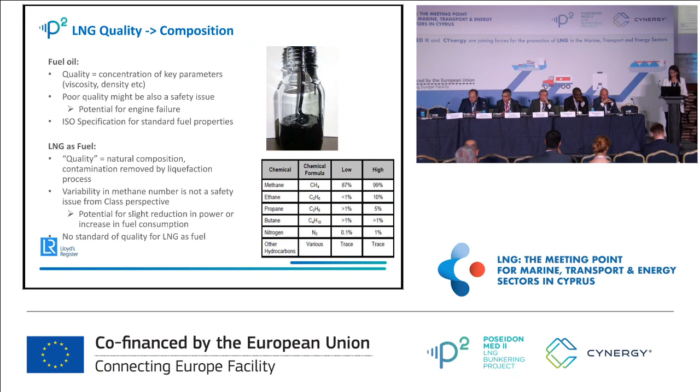The solution is very simple: it is forward planning. We need to take into consideration, first of all, the availability of the ports where we go, and also the ability of our machinery to use this type of LNG composition based on the trading area. One more thing we need to consider is, of course, the contractual arrangements. We need to have proper contractual arrangements in place before the arrival of the vessel at the port.

Now, with respect to the quantity, the solution we have decided to propose at milestone 16 is pretty straightforward. It is tried, tested, certified, approved, and most probably globally accepted by the LNG industry, and it is described as the GIIGNL handbook volumetric measurement, simply as that.

We have also thought whether we can try to use mass flow meters for measuring the LNG as fuel. However, we need to consider that mass flow meters have very recently been marinized, meaning they have started being used in Singapore from the 1st of January, compulsory for fossil fuel oils, so for the traditional fuel oil.

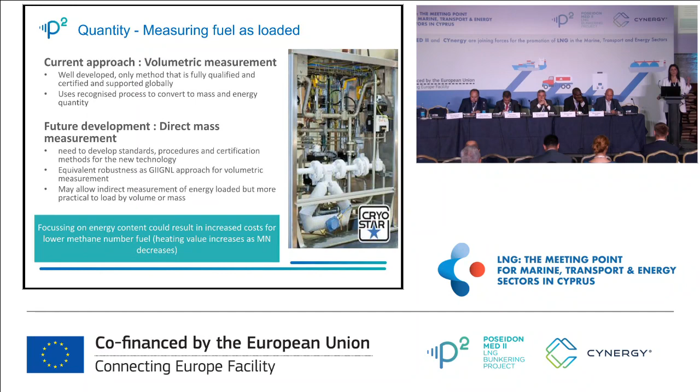One more thing we need to consider is that if we focus very much on the energy content, which is highly possible because with a mass flow meter you avoid calculating density and viscosity and go directly to mass, simplifying the quantity calculation, it is highly possible that we could end up with increased cost as we use LNG fuels with lower methane number.

Our technical investigation department based in Southampton, together with us, decided to conduct an evaporation study of the LNG quantity. We have made some assumptions.

Some of the key assumptions we made are, first of all, that the tank does not have a pressure or mass flow inlet or outlet, so we don't expect any boil-off gas outflow, and there is no preferential evaporation of species from the LNG. You understand most probably that these are not totally identical to reality, but we need to make some assumptions.

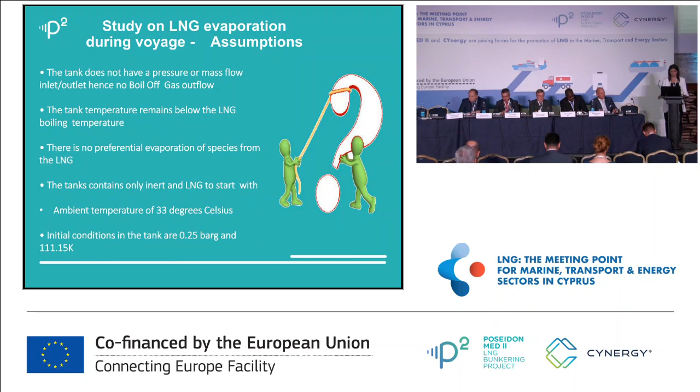Another assumption is that the ambient temperature is around 33 degrees Celsius, and the initial conditions in the tank are 0.25 bar and 111 Kelvin. Based on these assumptions, we proceeded with the modeling.

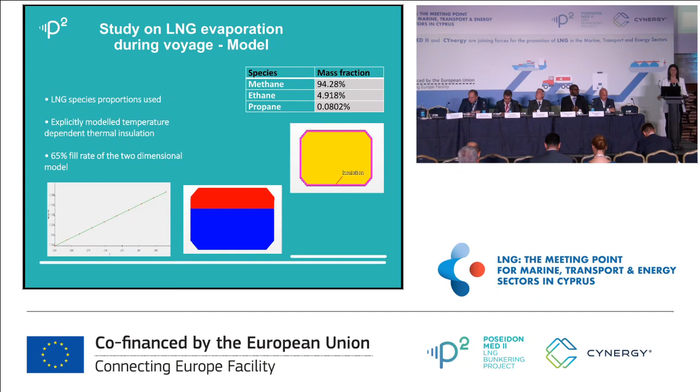The result of the evaporation study showed us that 0.1% of the total mass evaporated before the saturation point was reached, and the pressure in the tank reached approximately 0.7 bar at the saturation point. This second finding has also been reconfirmed by other studies conducted through Poseidon MED activities.

Now more on milestone 16 in the report: we have 6 routes as per Poseidon MED 2. We start from the key terminal, Revithoussa, and from there we expect the supply chain route to go to Iraklion, Igoumenitsa, Piraeus, and Limassol.

We also have one more future small-scale terminal based in Patras, and we expect the LNG to be delivered from Revithoussa again to the Patras terminal, and from the Patras terminal to the Igoumenitsa port.

Based on these 6 supply chain routes, and considering various types of operation, because it's not only one as has already been described, we have bunker vessels with type C bunker tanks. It is expected that we might also see trucks, because of the small scale. So we have terminal to bunker vessel, ship to ship, terminal to truck, and truck to ship.

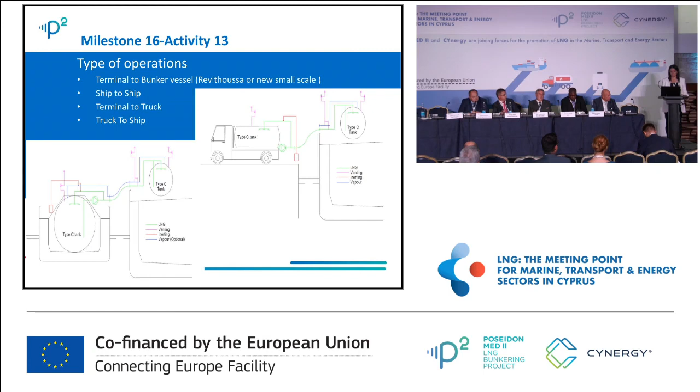All of these operations, along with the 6 supply chain routes mentioned before, have led us to create some flowcharts. I have decided to present you two of them. The first one is from the terminal to the ship, where the LNG goes from the terminal to the ship.

It is with the barge or the feeder where we have their type C tanks. As I say, this is a closed system, so it is expected that the quality will not change. When we say quality, we mean practically the density and the gross calorific value. So we allow the terminal to define these. And finally, what the ship gets is practically the volume, which has been measured again in the terminal, times the density, times the gross calorific value, minus any energy that has been consumed while the barge was using LNG as a fuel.

The second flow chart that we are presenting here is approximately the same, but in the middle you can see that we have the feeder with the membrane tanks. So it is expected that we might see a little bit of change in the quality of the LNG. We expect to see some difference in the density and the gross calorific value, not that significant though, because the volume is around 7,000 cubic meters, and the maximum days of operation is about 7, so we don't expect a lot of change.

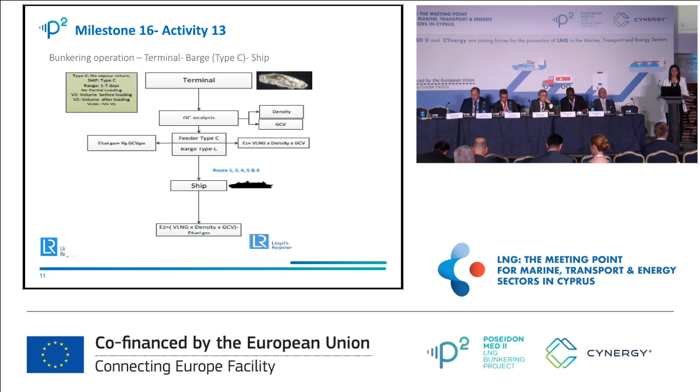Except for the flowcharts and procedures I have already described, covering various scenarios and bunkering operations, inside the report you might also find the energy transfer determination sheet, certificate of quality, and a proposed bunker delivery note. These are documents that, especially in the first flowchart, will go directly from the terminal to the ship. So we don't expect any significant involvement in the middle, which is totally different from what is happening currently with traditional bunker fuel oil.

In the traditional bunker fuel oil business, there is a lot of manipulation with respect to the fuel, and possibly malpractices that might happen in Singapore or other areas. With LNG, due to its nature, it's not that easy to be done. So practically the responsibility goes back to the terminal, and the documents given by the terminal are the ones that are valid.

I would like to conclude by saying that this report is not static, it is a dynamic process, and it is expected that it might most probably change, taking into consideration other activities that may come, as well as any industry developments.

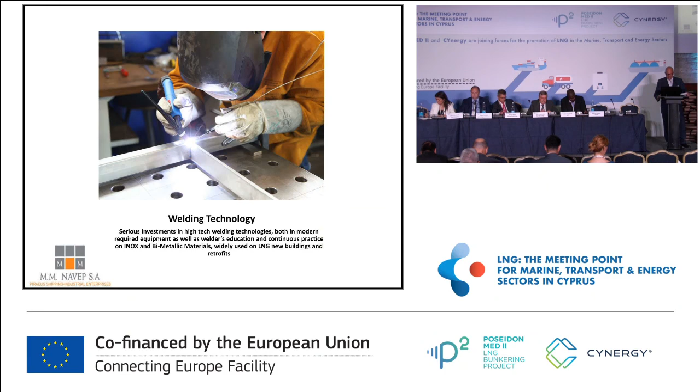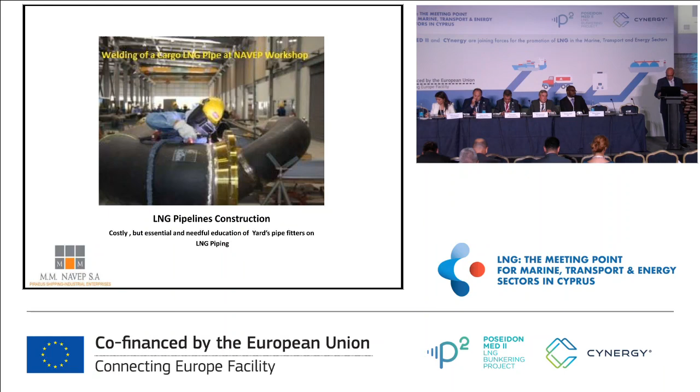Furthermore, pipe construction totally differs and varies from traditional ballast or bunkering piping. It is costly and essential - otherwise yards will not be able to undertake nowadays LNG new builds, for sure.

We have to invest in in-yard simulation of LNG storage facilities in order to process a complete loading and discharging sequence prior to vessel delivery. We are not constructing bulkers or tankers anymore. We have to prove and be sure, when delivering an LNG vessel, that the loading and discharging sequence, or the bunkering sequence in case of retrofit, will be completely assured.

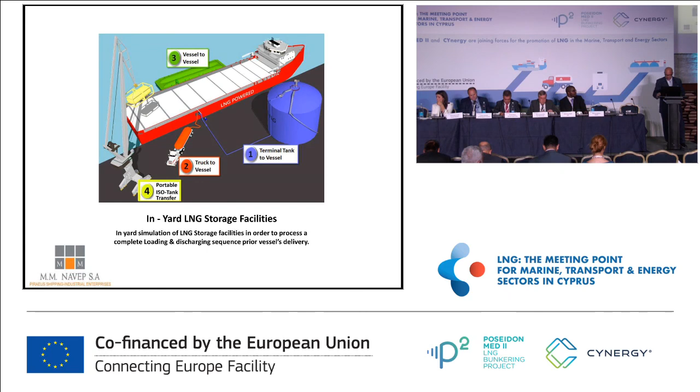The mentality of safety of our workers is one major topic. It's a very important issue. It's not anymore dealing with bulk carrier as a double bottom, but is dealing with highly flammable materials, explosive materials in some cases, and we have to be very careful with this, and invest also in safety material as well.

Most of all, in order for a yard to appear competitive in the LNG new building market, it has to offer reasonable deliverable packages, including designs, engineering, and supervision for building of the LNG units. The last chapter requires increased high-tech human in-house education skills, of which the daily presence on the ongoing projects is essential for the correct fulfilling of LNG new buildings or conversions.

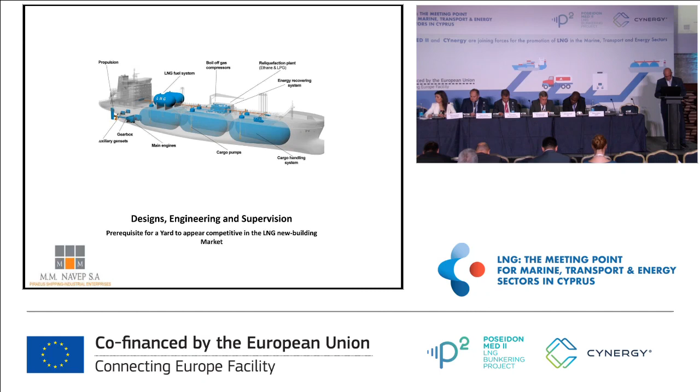Entering the last section, allow me to concentrate and give emphasis to a few active Greek yards which are able to fulfill the above stated technical prerequisites. We have not started at the moment, but we are here and willing to come in contact with owners, with operators. These yards, like Elefsis yards here, and Neorion yards in Greece, have for sure the adequate knowledge and experience, both in design, engineering and production, and are willing to undertake LNG projects related either to retrofits or even to new buildings.

Yards like this, and a great number of other middle-sized productive yards, it's really a pity for them to remain out of the active worldwide and fair competition, at the same time that one of the most major clients to the famous Far East yards are Greek shipping companies.

It's an honor for me to announce that our yard, Navep in Salamis Island, is the first one being examined and preliminarily approved by the Poseidon Med II program. Thus, we are proud to declare to the present community that we are here, offering in Greece and in Cyprus our expertise in LNG retrofits and new buildings, especially having lately fulfilled in Greece the two biggest conversion and repair projects, the Industrial Jazz and the famous Qatari yacht Al Mirqab.

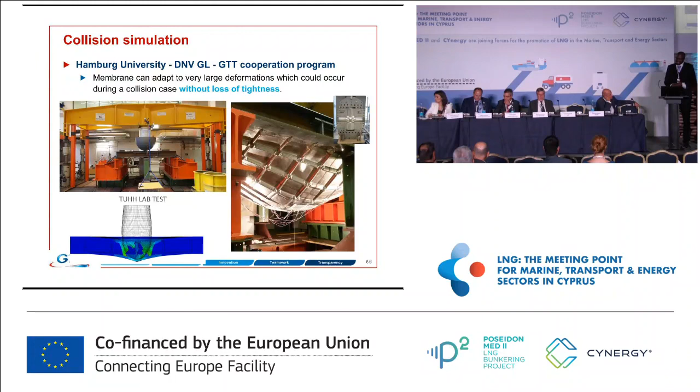And then you're going to have a collision coming probably all the way around. We never hope so, but things like this have happened. So we just go to the lab and see what it does. And surprisingly, we have reached a rupture point of 8 meters, which means that to be able to break the containment system, the bulb has to enter up to 8 meters.

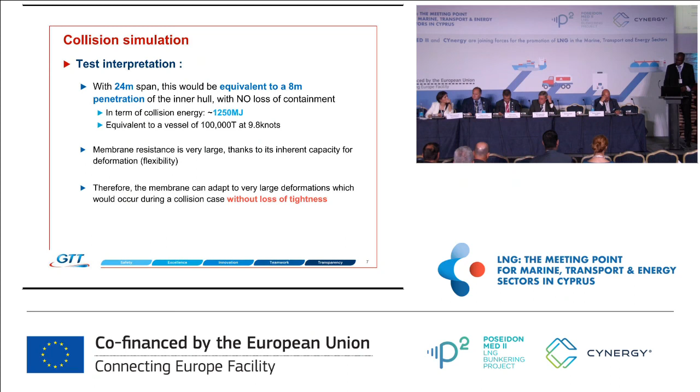So for skeptical people who question what a containment system with LNG does, okay, we're going to define some safety zones, but the result is very clear here, and that's what we're trying to do in the company. We're trying to get into the details of this surface thing, and trying to give some analytical answers. That's very encouraging to address this collision point - it doesn't really break easily.

The second pillar on the designer side is just to see to which point the transfer operations are under custody, because if we talk about a barge fueling a container ship, there are so many challenges. First of all, the fueling operation has to be performed not necessarily in a short duration, but in a duration that doesn't compromise the overall staying of the container - there are time-ups going on, simultaneous operations.

There is no need for highlighting the fact that venting is not allowed at all, except in emergency situations. So reputation might take a hit right there. The owner might not really want to dig into the LNG thing for the next vessel. So we understand that ship-to-ship transfer custody is a must.

So how does this picture differ from big scale? At small scale, we're going to have the scale impact - equipment having lower capacities - the frequency impact, because we can have some kind of daily operation or hourly basis depending on different vessels, and all these safeties and SIMOPs.

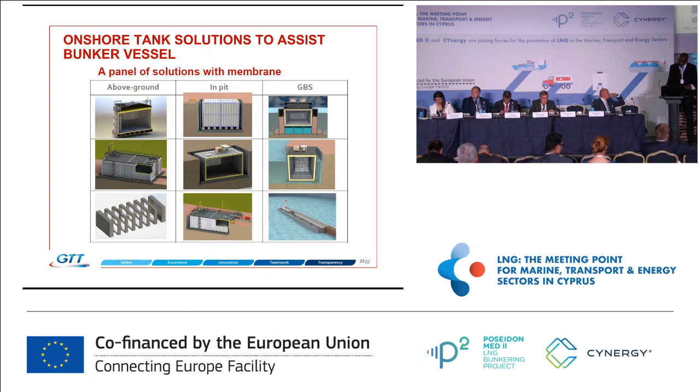So solutions are here, and the advantage of membrane is that if you have visibility issues and space to occupy, there are a lot of solutions, because it's integrated tanks. The hull or the concrete would be the base, and all the loads would be transmitted to that final structure. There is no space in between, so that's maximizing the volumetric efficiency. Just pass by this, but you understand it.

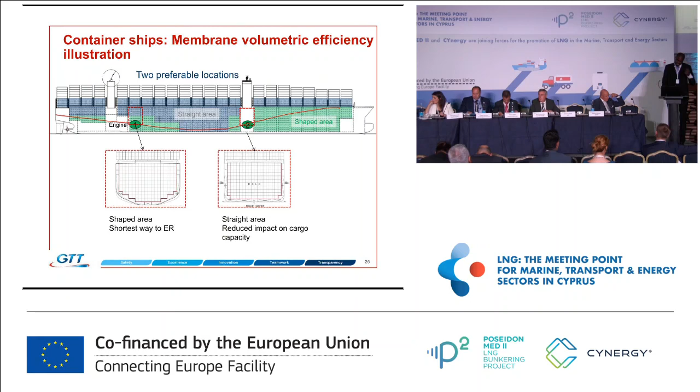Membrane has high volumetric efficiency, and so we did this work with a very well-known container ship owner. Hopefully, you're going to hear about them in the very next days.

Well, okay, that's my conclusion. I think the prerequisite for doing all this job from a designer standpoint is to understand the challenges, and I think that we pretty much did a good job implementing our experience from the big scale and scaling them down, being careful about what it takes to do something very good.

On the other side, there is still the collaboration piece. We initiated things, but of course, there is a shipyard who would like to go for membrane in Cyprus, and we're really ready to, because the company is putting money and investing since we see the benefits down the stretch. So that's a good talk, and we sit around the table.

So just a kind of call for action. If there is ever a need for it, either on the training side or shipyard readiness side, we can go for something. That's how we think we can be valuable to the Poseidon Med. Thank you very much.

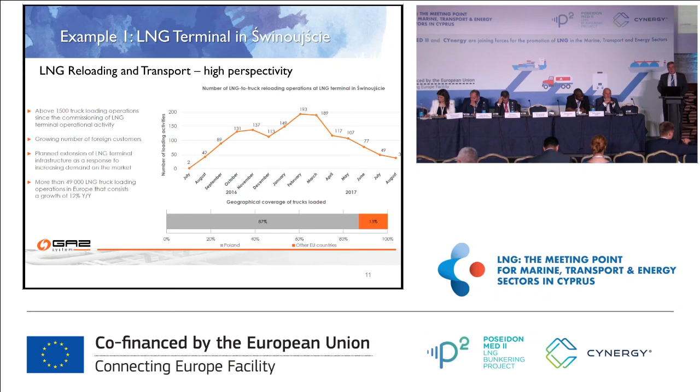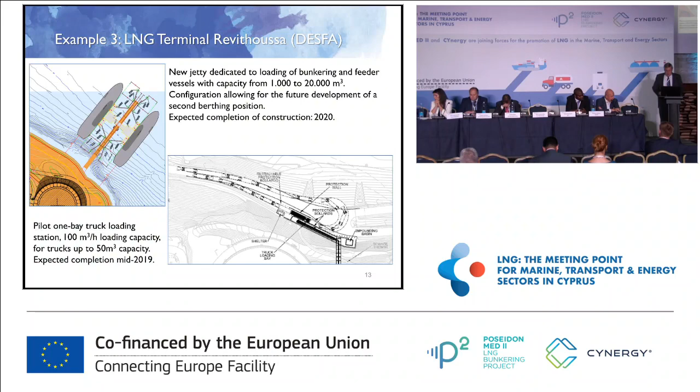As an association, we try to promote this, of course. Our members have to do it because they are the terminals, they are building the facilities. We are promoting that, and just to close, I'd like to point you to some sources of information we provide. We offer maps which contain a lot of information about current developments, one on the large-scale terminals, and perhaps more important for here, one for the small-scale terminals. We're working on an update, and the next one will be available as of December.

This small-scale map covers infrastructure for both sea transport, transport on inland waterways, and road transport, and it provides some information on each of the installations indicated on the map. So in the interest of time, I will stop here and look forward to the discussion. Thank you.